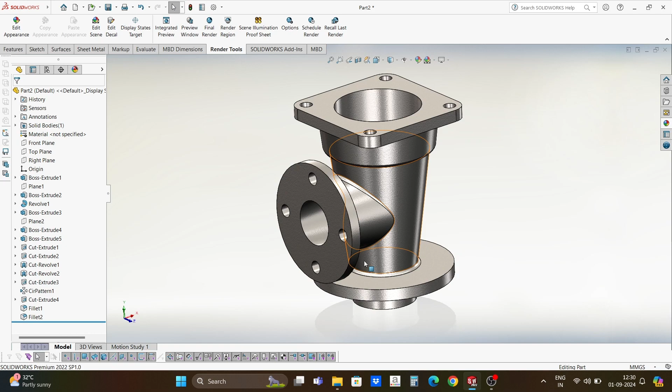Welcome everyone. Today we are going to create this valve body in SolidWorks.

Let's get started. Start with New File, select Part, and make sure the dimensions are in millimeters. Now choose Top Plane to sketch.

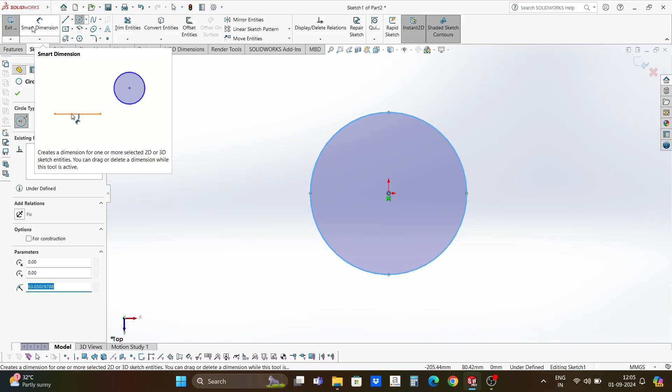Draw a circle at origin and give a diameter of 132 millimeters.

Go to Features, select Extrude Boss Base, keep it blind, and enter 11 millimeters.

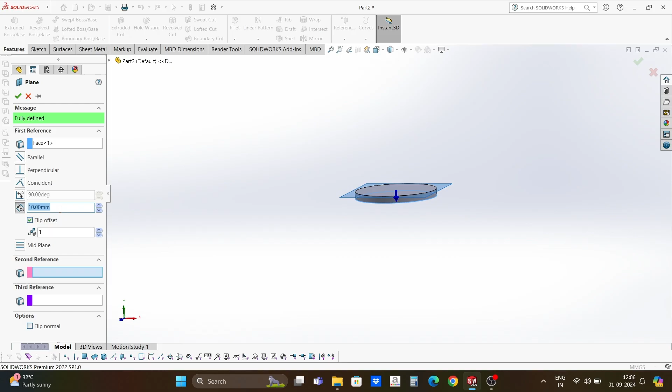Now from Reference Options select Plane, and select the bottom face. Check Flip Offset to reverse direction of the plane, and enter 163 millimeters distance for the plane. Click on this plane to sketch.

Draw a center rectangle at the origin point, keeping a size of 120 millimeters by 120 millimeters.

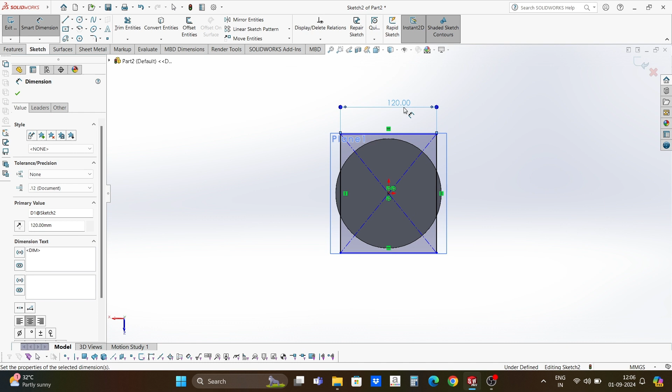Go to Features again and extrude it up to 11 millimeters. Now hide this plane by clicking on this eye.

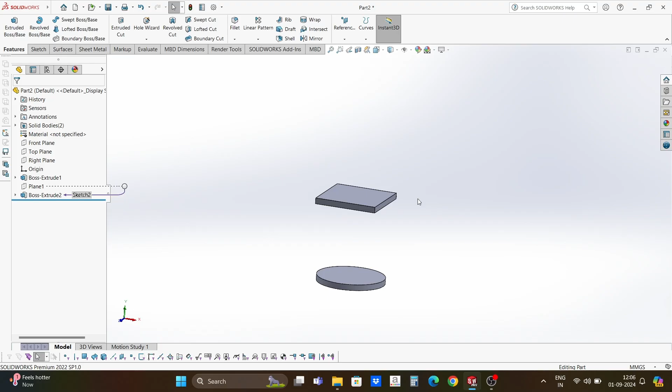Choose Front Plane to select Sketch. First draw a vertical centerline here, then draw the sketch like this.

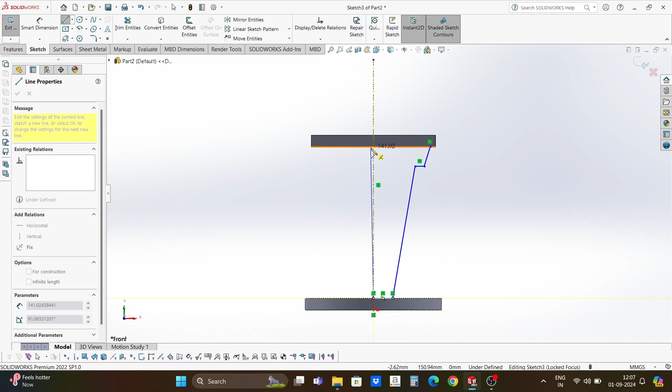Go to Smart Dimension, select this point and then select this centerline. Enter diameter of 112 millimeters here.

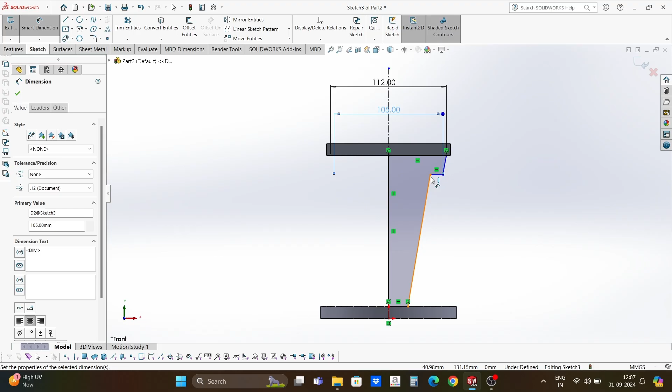Next select this point and enter diameter of 105 millimeters. Select this point also and enter diameter of 94 millimeters.

Now select bottom point and enter a dimension of 64 millimeters. Select this point and bottom line to give a height of 112 millimeters.

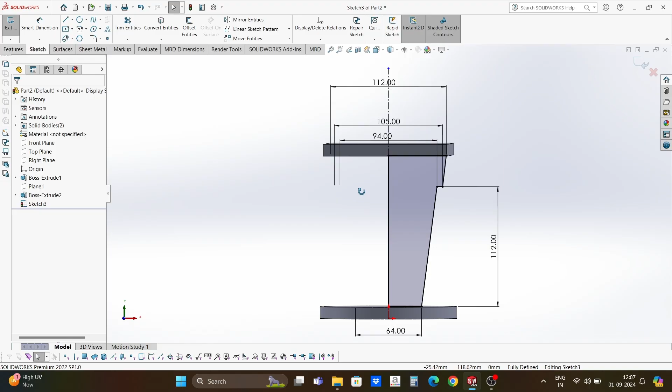Go to Features and revolve this about the centerline.

Select the bottom plane to draw a circle. Enter diameter of 60 millimeters.

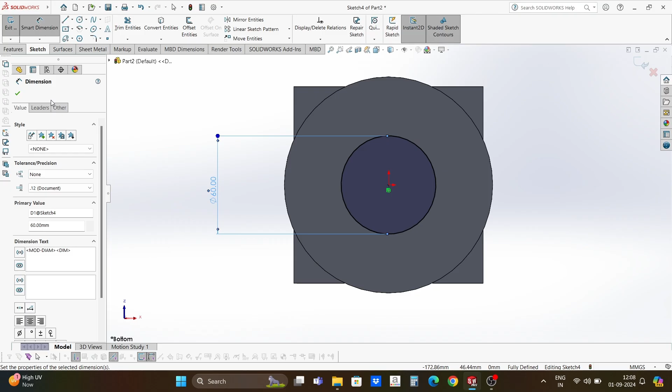Go to Features and extrude it up to a height of 22 millimeters.

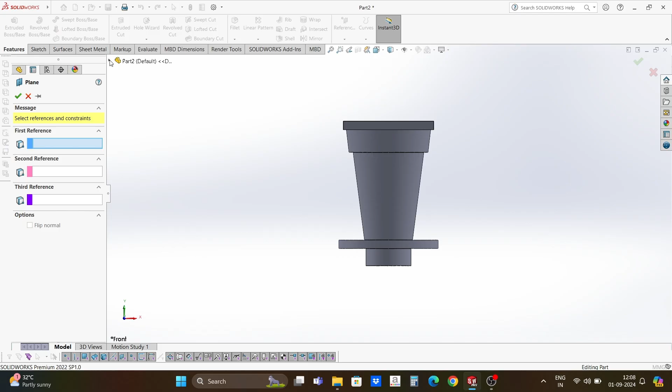Select Reference to create a new plane. From this drop-down, select the right plane. Reverse direction by Flip Offset, and enter a distance of 80 millimeters for this plane.

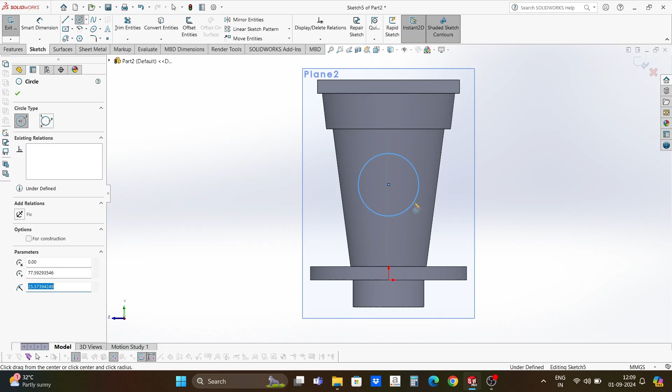Now select this plane to draw a sketch. Select Circle here and from Origin go upside. Enter diameter of 112 millimeters here.

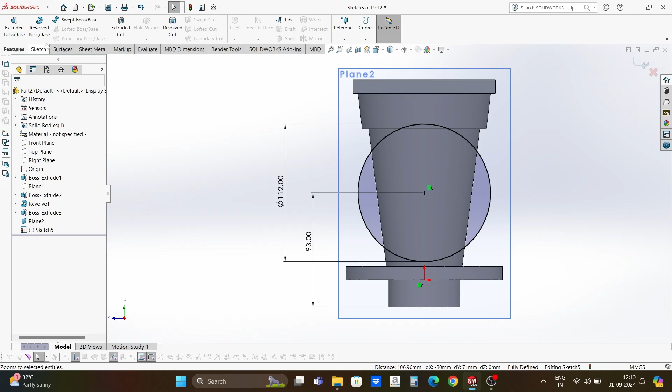Enter height of 93 millimeters from bottom face for this circle. Select Origin and then select the center of the circle to keep the relation vertical. From Features, select Extruded Boss/Base and enter a size of 10 millimeters.

Hide this plane. Select the inside face here to draw a sketch.

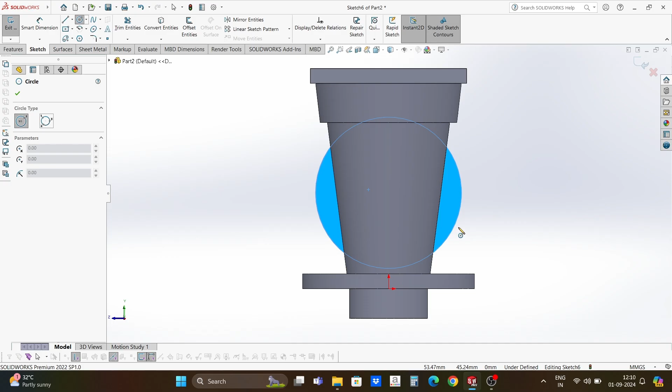Select Circle, then hover around this outer circle to get the center point. From center point draw a circle of diameter 60.3 millimeters.

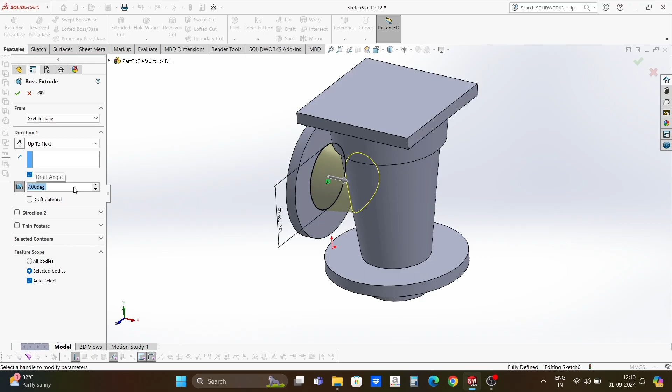From Features menu, select Extrude. This time choose End Condition, up to Next. Select this draft option, enter a draft angle of 7 degrees, and check the box for draft outwards. This time, a tapered surface is created with an angle of 7 degrees.

Now select the top surface to draw a circle here. Enter diameter 82 millimeters.

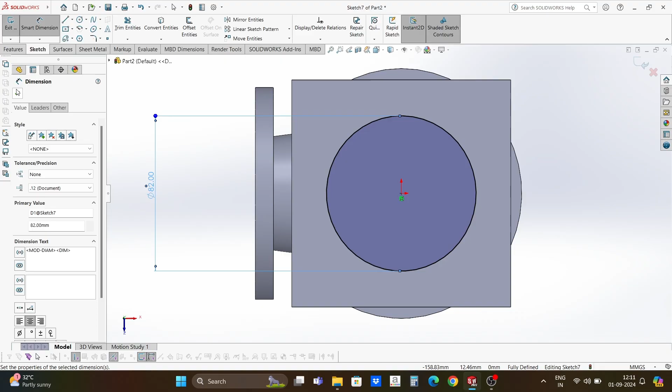From Features, select Extrude Cut. Keep condition blind and cut it up to 35 millimeters.

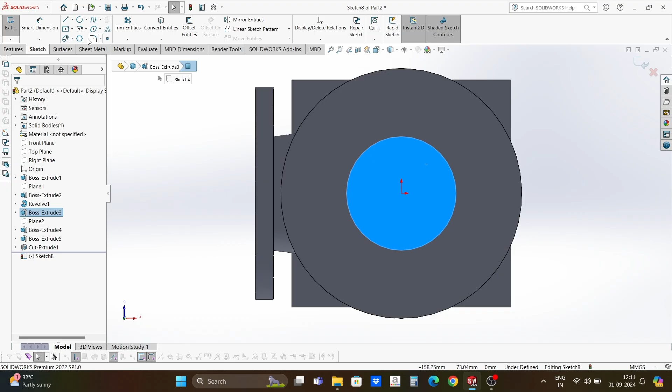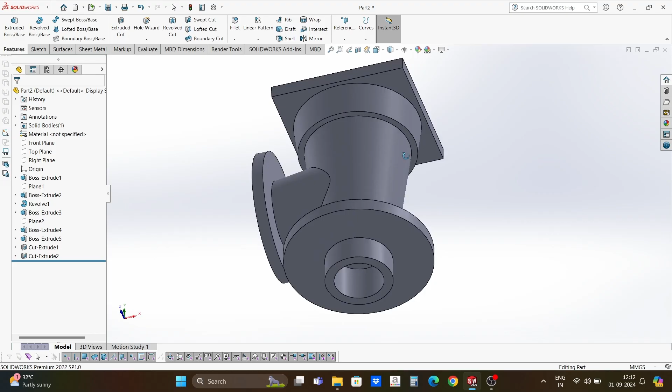Similarly, select the bottom face and draw a circle of 44 millimeters diameter here. From Extrude Cut, keep the end condition up to surface. Select this top surface - our depth will be created up to this selected surface.

Now select the front plane to draw a sketch. From the Display Style drop-down, choose Hidden Lines Visible. Draw a closed sketch like this from this point.

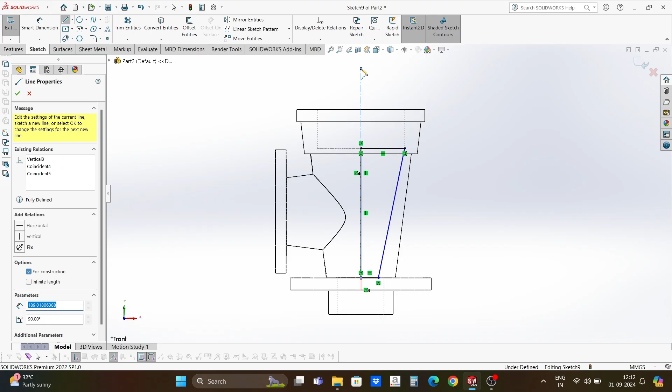Draw a center line and go to Smart Dimensions option. Select this endpoint and then the center line to enter a diameter of 54 millimeters.

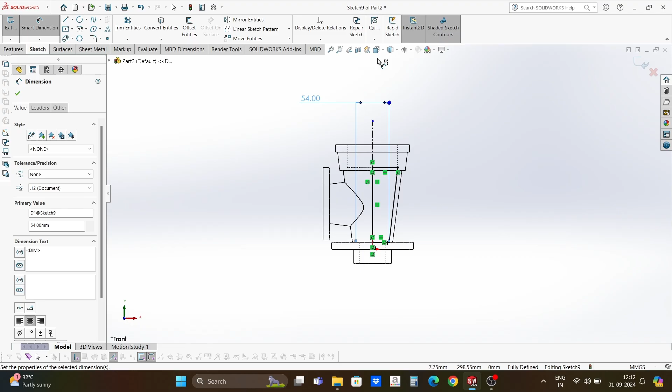Now go to Features options and select Revolve Cut feature. You can see from top that our inner part is now completely clear.

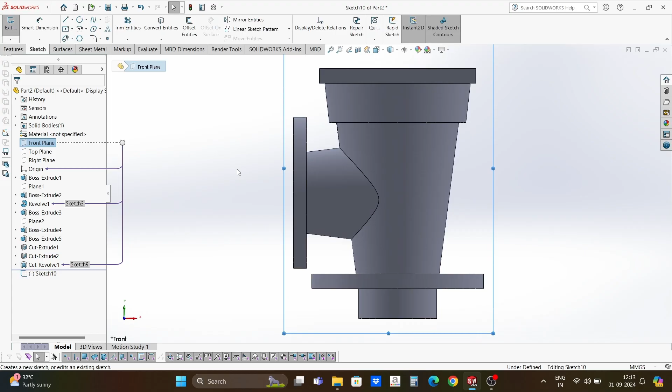Select Front Plane to draw a sketch. Draw a horizontal center line from here.

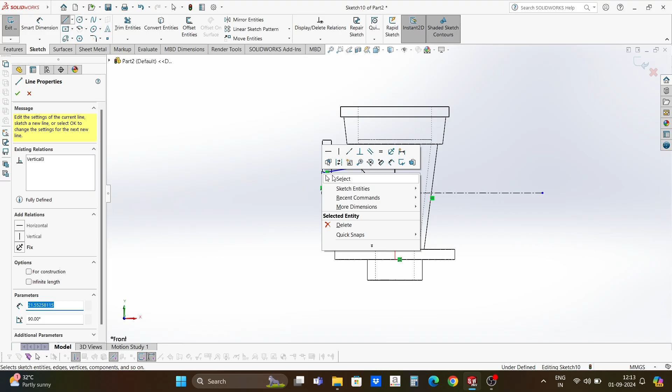Choose the option of Hidden Line Visible, then draw a sketch like this. Select Smart Dimension and then select this point and then the center line to enter a diameter of 42 millimeters.

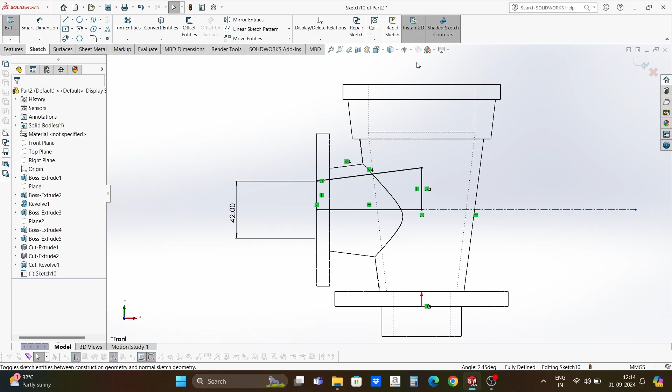Now select this outer edge and then this sketched line, and make a relation of parallel here. Now go to Revolved Cut feature and we will get a clear hole here from side face 2.

You can see the section view of this part by clicking here.

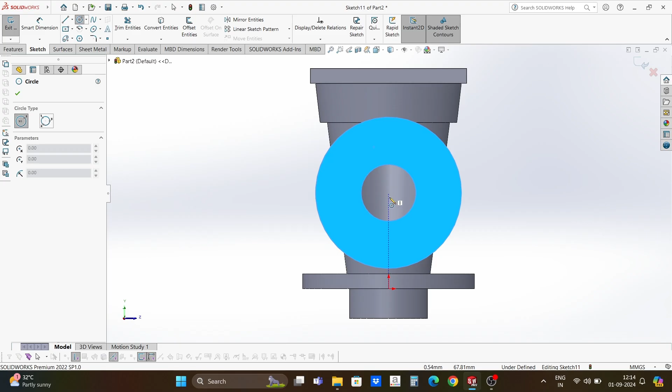Select the side face to draw a sketch. Draw a circle of diameter 85 millimeters from the center point of this circle.

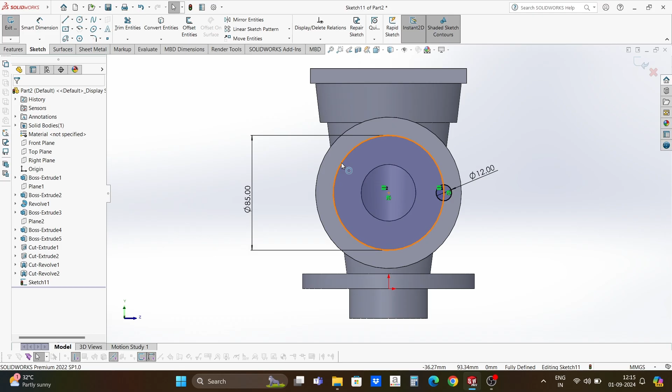Draw another circle of diameter 12 millimeters. Now select the first circle and make it for construction.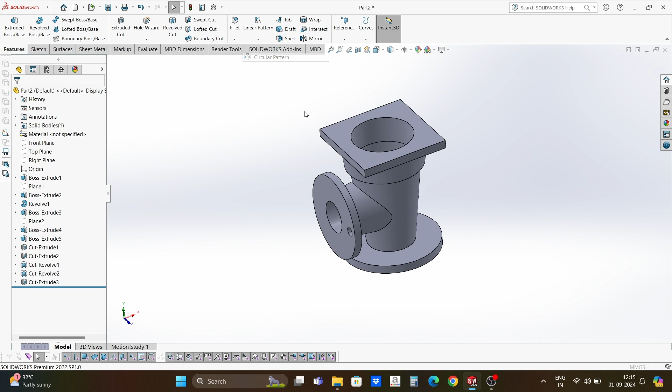From Features, choose Extrude Cut to create a hole. From here, choose Circular Pattern option. First, select the feature to pattern this hole of Extrude Cut 3.

Now select the direction of pattern, this outer circular surface. Keep numbers 4 and 360 degrees.

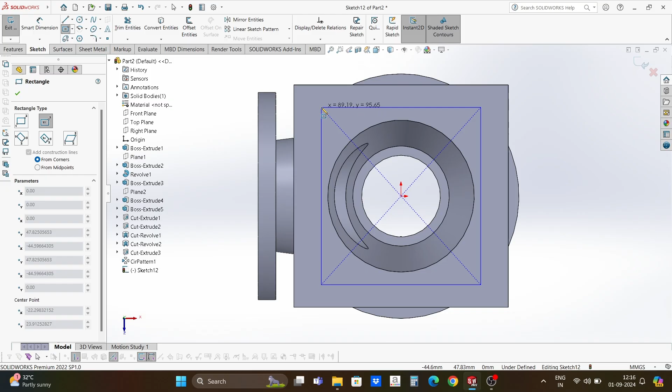On the top surface, draw a sketch to create a hole. First, draw a center point rectangle for the reference. Give it a size of 95 mm by 95 mm.

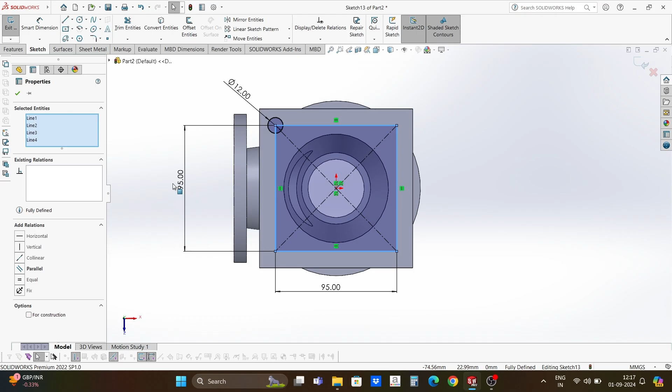Now draw a circle of 12 mm at the corner of the rectangle. Select Rectangle and choose for construction.

Now draw vertical and horizontal lines from origin. We will use them to mirror the circle.

Select Mirror Entities, choose Circle, and then mirror it about the center line.

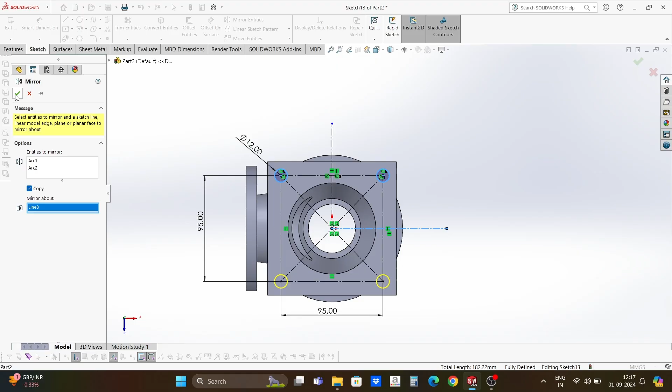Go to Features Options and then select Extrude Cut to create the holes.

Turn on RealView Graphics options. Assign the material from Appearance options.

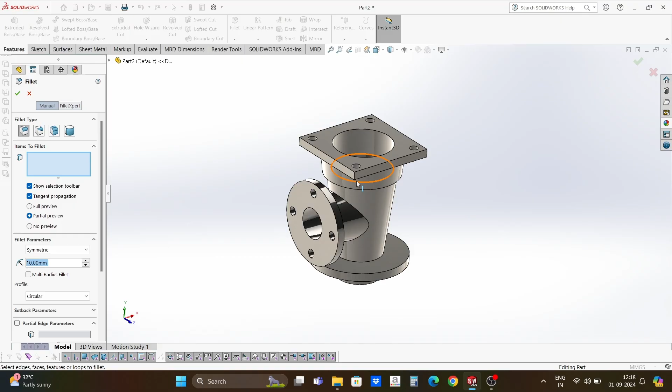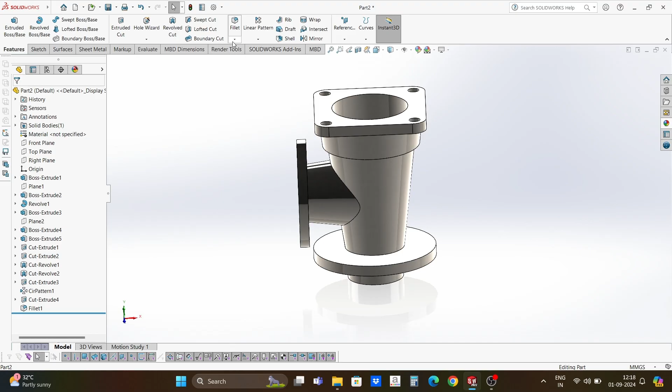Add some fillet on the sharp edges. Fillet of radius 10 mm for the top surface here. For remaining sharp edges, you can apply a fillet of 2.5 mm here.

Our valve body is now completed.